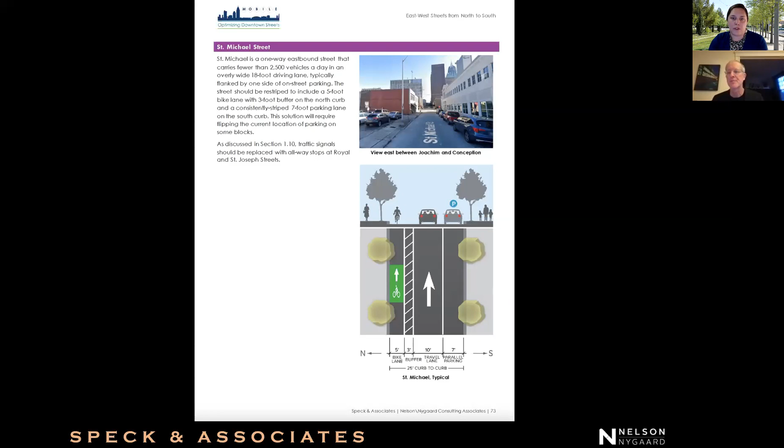So I'm going to pass it back to Jeff, who's going to explain all of this through the form of the presentation tonight. So thank you.

Thank you, Allison. And I also want to acknowledge tremendous participation and creative thinking from engineering staff, public works folks, others at the city, and of course the Bedsole Foundation that supported this study deserve our gratitude as well.

So I'm going to take you through what for Mobile are the 10 steps of walkability, or the 10 steps of making Mobile feel safer and actually be safer for pedestrians. But it all boils down essentially to driving speeds. It's a remarkable condition in cities that a car going 35 miles an hour is about 7 times as likely to kill you than a car going 25 miles an hour. And that difference between 25 and 35 miles an hour, which is the speed people are often driving in our city centers, is a super important difference.

The question is, what can we do to have drivers, while they're downtown, closer to the lower end of that scale? Elizabeth mentioned the data that had most recently come out, and it's disappointing to learn that among the most dangerous places to walk in the United States, Alabama as a state jumped up 2 places in the last 2 years, surpassing, I believe, Texas and maybe New Mexico, to become the second most dangerous state in the US.

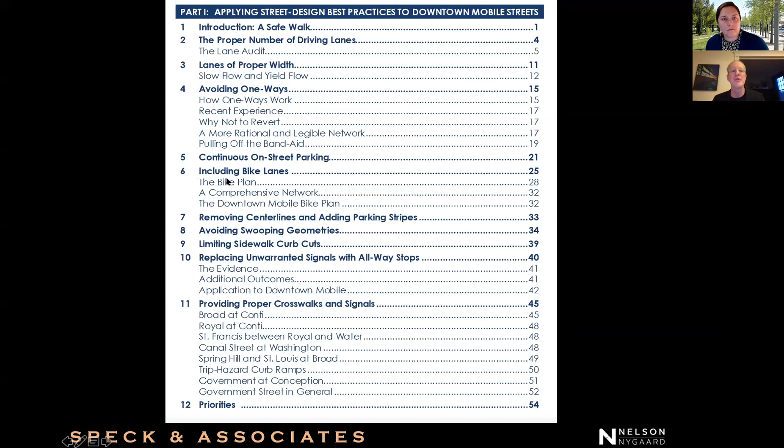There are, whenever I do this in a city, usually between 8 and a dozen things a city can change to make itself safer downtown. In this case, we have priorities and an introduction. Actually there are 10 items, 10 different things that can be improved in downtown.

And these are them. I'm not going to explain them now, I'm going to go through them one by one. But: no more driving lanes.

So these are the things you can do to make downtown more safe: having no more driving lanes than you need to handle traffic, having lanes of the right width, having few one-way streets, or at least fewer, having continuous on-street parking as much as you can, having a useful bike network as opposed to just a decorative or sporadic one, having fewer center lines in your street and more stripes that delineate the parking at the edge of the street, having fewer swooping geometries which encourage speeding, having fewer curb cuts across sidewalks where drivers cross sidewalks with their cars, replacing traffic signals with all-way stops wherever possible, and I'll explain why. And finally, the kind of obvious one, but one that still needs attention, is having proper crosswalks and, where appropriate, pedestrian crossing beacons.

So those are the 10 things, and the whole discussion today, except for the end where I'm going to talk about priorities, is taking you through these 10 steps and describing the changes that each step suggests. Now, Allison showed you how the plan was organized into 2 sections.

One is the 10 steps, and the other is the street by street analysis. I'm not going to take you through the street by street because that would be incredibly mind-numbingly painful and time consuming. However, what I've done is illustrate each of these 10 conditions to change by choosing a number of streets, in fact most of them, to which that pertains. So I'll show you that as we go. It's going to be a bit of a tour of downtown as we go.

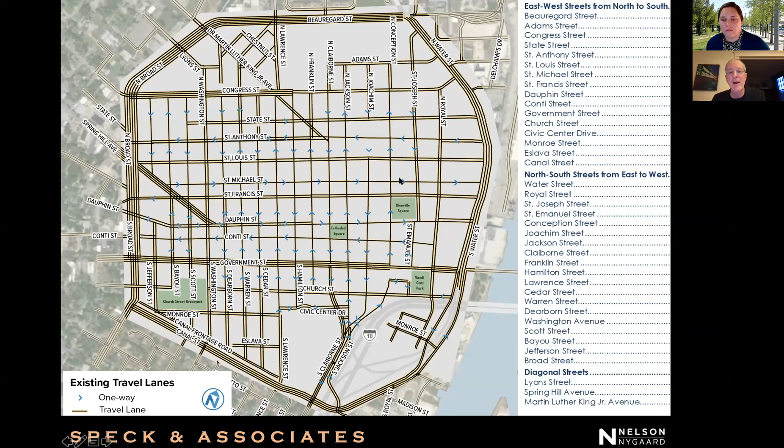You also have the diagonals of MLK and some other smaller streets like Chestnut, and then Spring Hill in this location. That's your map. So let's go one by one.

The first thing, and it's kind of obvious, is you don't want to have more lanes than you need. The more lanes a street has, the more it looks like a highway, the more it operates like a highway, the faster cars go, the further you have to cross.

This is Oklahoma City, where I worked on a team that rebuilt the whole downtown core, and we counted the number of trips. The key thing here is we call it a street audit or a lane audit. We count the number of lanes and we count the number of trips, and we compare the number of lanes to the number of trips.

We understand we need a certain leeway in there for growth and other things, but we look at the peak hour, the most congested hour. We know what a lane can handle. What we found in Oklahoma City, as we find in most cities, is that there are at least some streets—in places like Boston there's almost none—but in most cities there are some streets that have more lanes than they have traffic, and that means the opportunity to get rid of lanes.

So here in Oklahoma City, a typical street, we were able to turn it from this into this. And I always say this is the way to do it expensively. In Oklahoma City, they had a lot of money—they spent $200 million. I always tell cities, though, you can restripe a whole downtown for the price of rebuilding a few streets.

A more typical job, more analogous to what we propose for Mobile, is Cedar Rapids, where a typical street looked like this, and we did the car counts and were able to turn it into this. This is the day it opened, which is why there are cones and someone parking in the bike lane. But that's the sort of thing we've been doing now for 20, 25 years all around the US.

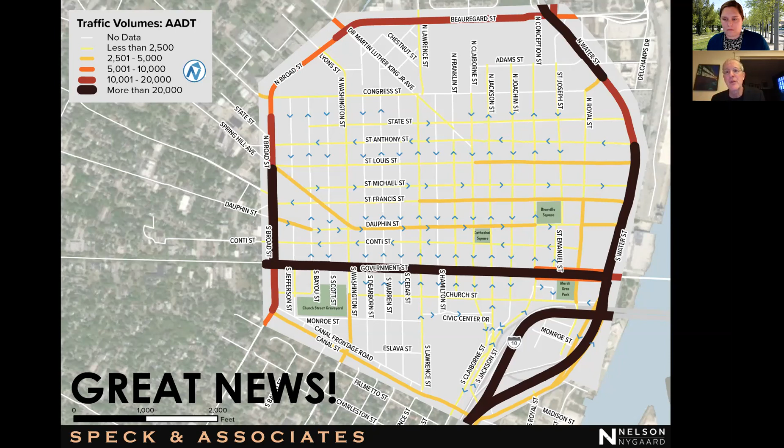Here we have a condition which is absolutely remarkable, which I haven't experienced since Cedar Rapids, where you have no problems in any of your streets. There's not a single one of these streets, aside from the highways and the perimeter, that can't be 2 lanes or less. So we have a condition we rarely face, where we can make the streets what they want to be without worrying about congestion. That's a great enabler for us.

To get into more detail, here's the map of demand again. This is what creates the number of lanes you need, and here's the number of lanes you have. If you compare them, the lanes flashing in red are actually extra lanes that can be put to better use.

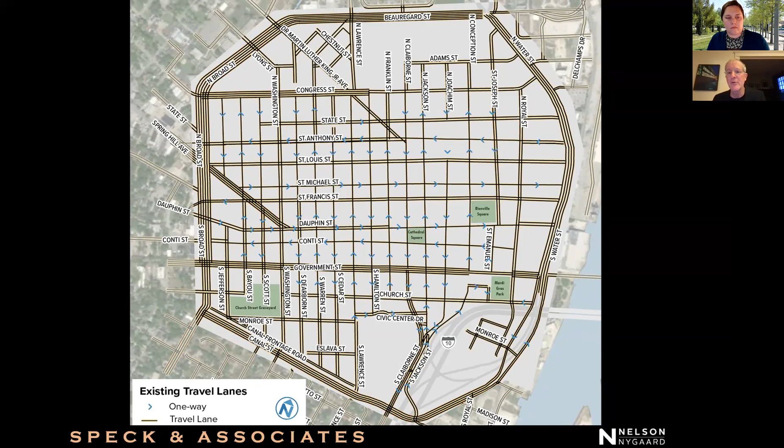What is that use? It could be parallel parking you don't have, bike lanes you don't have, or in certain cases narrowing the street, although that requires construction we don't typically recommend because of the cost.

Canal Street is one of many streets, and we can talk a lot about Canal, but it was created as a highway for traffic that never came. You've already restriped it to remove one of its lanes by turning it into a bike facility, so now Canal has about 2.5 times as many lanes as it needs, as opposed to 3 times as many. But you can see there's still excess capacity there.

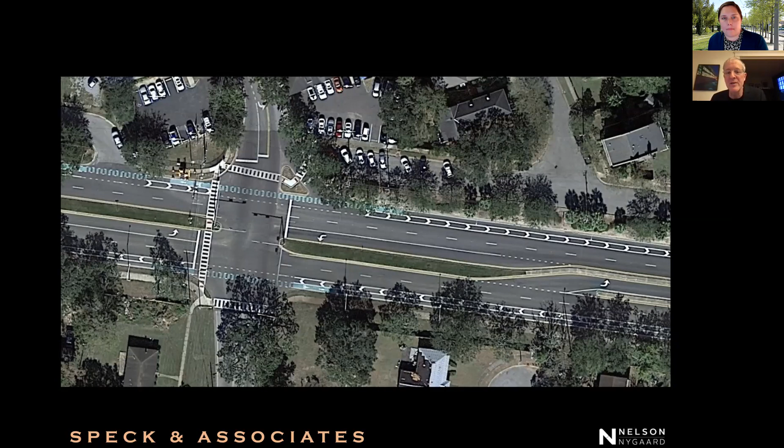The biggest challenge with Canal, unless you rebuild it, is that there's really nothing else you can put there because there isn't demand right now for much parking on it. So our short-term recommendation for Canal is to leave it the way it is, albeit better protect the cycling, because we don't have a better use for all that asphalt.

Congress Street, coming in from the west with 4 lanes, only needs to be 2. Spring Hill, coming in from the northwest with 4 lanes, only needs to be 2. MLK has between 2 and 4 lanes, depending on whether this illegal parking is made legal along the curb, but 3 to 4 lanes only needs to be 2.

Washington Street, as it approaches Canal in the southern part, has an extra turn lane it doesn't need. Royal Street has center turn lanes it doesn't need, which make it impossible to park on this curb, something businesses there would very much like. Claiborne, heading south of Government, has a lane more than it needs, etc.

These feeder roads along the highway that connect Water Street to Canal Street, and could actually be an important part of a circular bike network, have twice the lanes they need. And Dauphin, west of Claiborne, where it's 2 lanes eastbound most of the time, has a lane more than it needs to carry traffic.

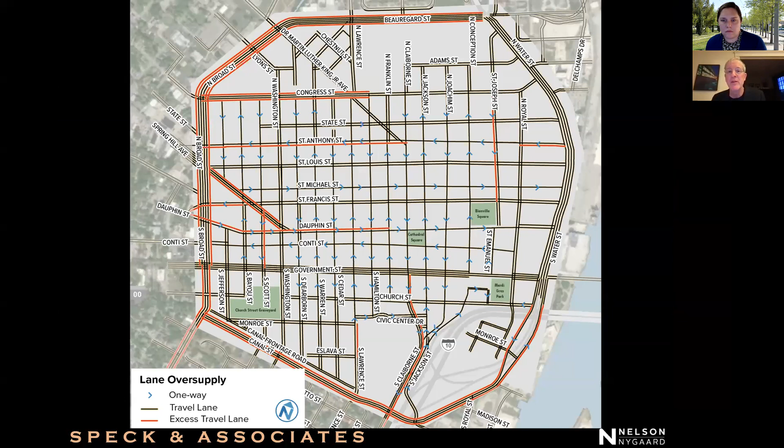So you see all those lanes I mentioned in red - I may not have mentioned them all, but that's all money in the bank. There are really a couple things that are money in the bank when you're doing these plans in terms of opportunity for making downtown better.

The other one is the width of the lanes - that's the second item: lanes at the proper width. We've known for some time that the wider lanes are, the faster people drive. Generally speaking, a 10-foot lane is the proper width for a high volume downtown lane. NACTO, the National Association of City Transportation Officials, has made this very clear.

The reason they've had to make this clear is that over the last few decades, starting in the 80s, there was mission creep of wider lanes taken from highway design—used because people are speeding—into downtown design. Downtown lanes in many municipalities became 11 or 12 feet wide. In places I work, like Albuquerque, that's still the rule. A 12-foot lane is a 70-mile-an-hour lane. There's no reason to have a 12-foot lane that induces speeding when you could have a 10-foot lane instead. That's an important model to understand.

On the slower, more residential streets in downtown Mobile, a full 10-foot wide travel lane doesn't make sense when volume is quite low. In fact, the most valuable streets in every community—the kind of street I was fortunate to grow up on—have two-way travel in an area typically 12 to 13 feet wide. Because there's not much traffic, it functions well as what's called a shared street, yield street, or queuing street. That model's available to us as well.

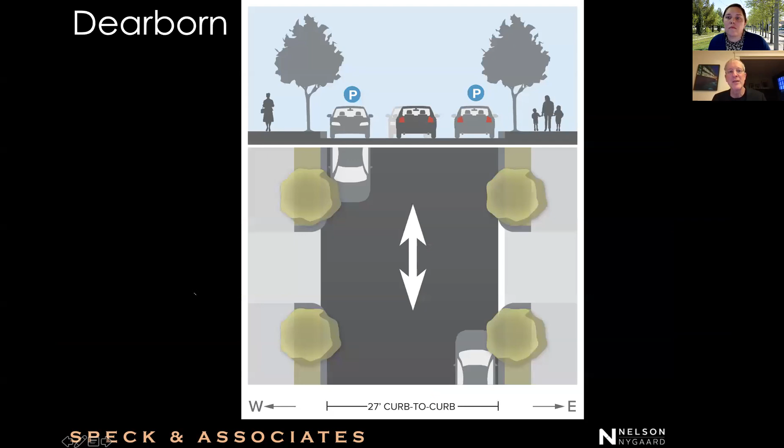But what happens is that the parking isn't that thick, and you're able to duck and weave between parked cars. It's precisely this sense of friction that makes the street a safe street. That's a model we need to use. Dearborn enjoys it; Monroe Street, in the same neighborhood against Canal, enjoys it too.

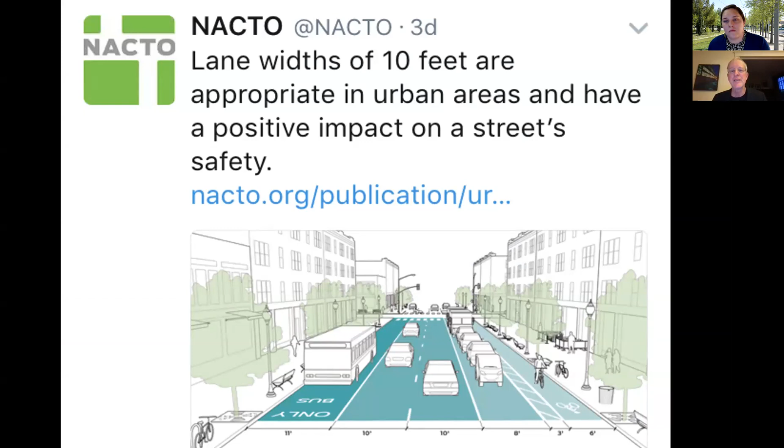But let's look at some examples of where we're violating these rules. In terms of the 10-foot lane, Congress Street—here's a section that's 3 lanes wide, so it should be 30 feet wide, but it's got an extra 15 feet in it. Here's St. Joseph, which has parking on both sides and should be about 36 feet wide; it's about 45 feet wide. Here's St. Anthony, which has an extra 5 or 8 feet in it.

Washington—this is 2 lanes, no parking, should be 20 feet. It's 30 feet. This is money in the bank, things we can use for other purposes. Claiborne—these lanes are about 15 feet wide, south of Government Street.

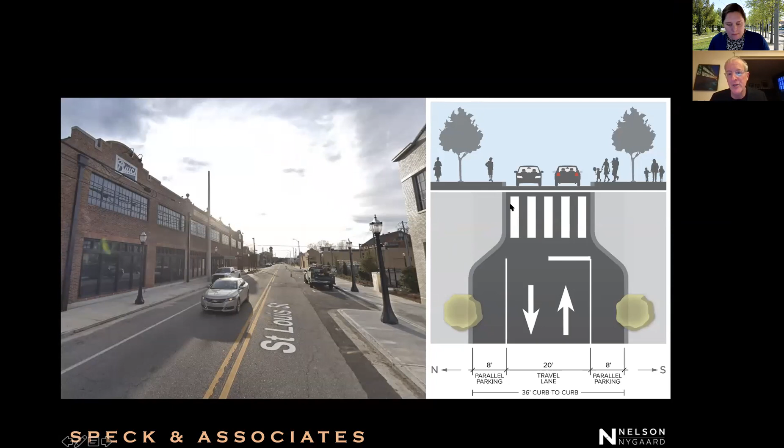St. Louis Street, interestingly—and we believe we've influenced this—is currently being rebuilt quite nicely, but with a 12-foot standard. So this street that should be 8, 10, 10, 8 is instead 8, 12, 12, 8. We're recommending it continue to be built in the same fashion, but with a proper 20-foot zone between the curb bulbs, not a 24-foot zone between the curb bulbs at the crossings.

Then you've got two different types of one-ways that have a little extra space in them. You have one-ways with significant traffic—your east-west one-ways—and the ones on the eastern half of your downtown that are more in the heart of the city and don't have the light traffic that would make them a proper residential yield-flow queuing street like you'd find on Dearborn.

On a street like this, you've got about 16 or 17 feet where you only really need about 12, since it's only one lane—10 feet is a little narrow for a single lane. So you need at least 10 or 12 feet clear here, but you don't need 16 or 17 feet. Conti is the same circumstance—you can see some parking here that no one's using, but it's got that extra width.

Conception, same thing, just a little bit extra width. Claiborne as well, and also Franklin when it's in the more...

Now we're changing to a different type, the Dearborn type of street. So there's a bunch of streets now, unlike this one in the heart of downtown, that are further west or further north.

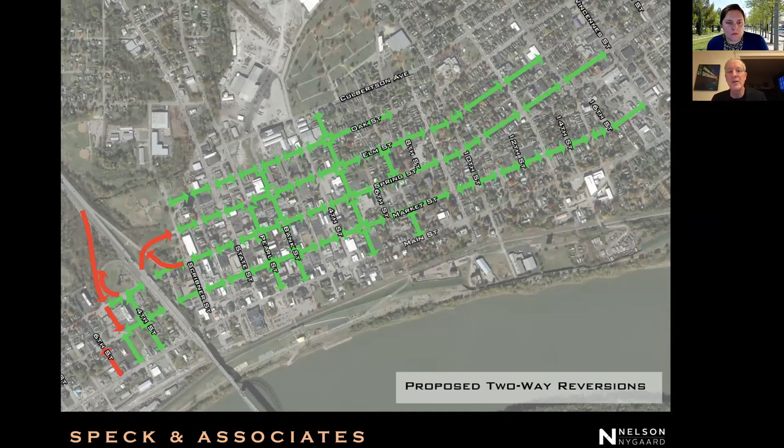And the folks who were worried about it, like the police chief, are actually the biggest boosters for this plan. The police chief says he's never seen a better scenario for public safety. Speeds have been reduced, crashes are down, and response time to calls for service is far better than it's ever been. I have separate testimonials that are in the plan that discuss how it's really helped business as well.

Now, we don't recommend it for every street in every city, but the fears that people have never seem to materialize about what's going to happen when you, and we say revert, not convert, because when you revert these streets back to the two-way traffic that they once enjoyed, you're really just returning them to their original state.

The condition then in downtown is that you have a couple larger streets, St. Joseph, which is already headed towards two-way travel, and St. Anthony, which is the other major street that we're recommending for two-way travel. The remainder of these streets are these delicate little neighborhood streets that we already described as having a little extra room in them and being similar, for example, to Monroe or to this piece of Dearborn that are already two-way, but simply maintain their one-way travel.

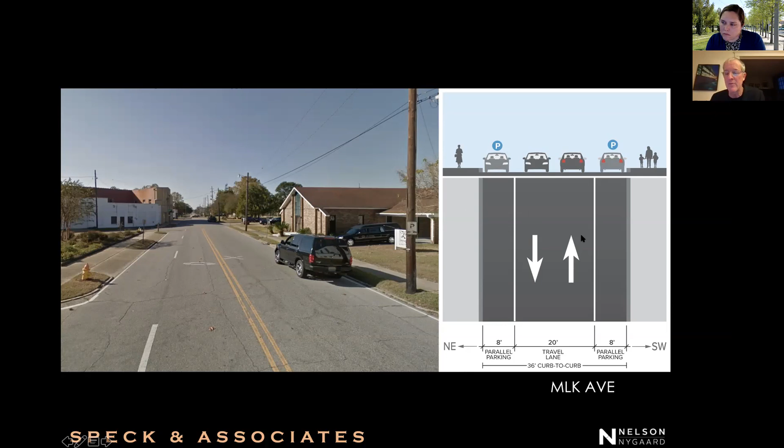One of those is MLK, which people park illegally along, but there's no reason these extra driving lanes couldn't be permanent parking lanes. So that's what we're recommending. Then there's the main stretch of Washington, north of Spring Hill, which is this 30-foot street that could be a 20-foot street. We're making the parking as wide as we can, 9 feet, giving you an extra foot still, but much safer and more normal width for your driving lanes.

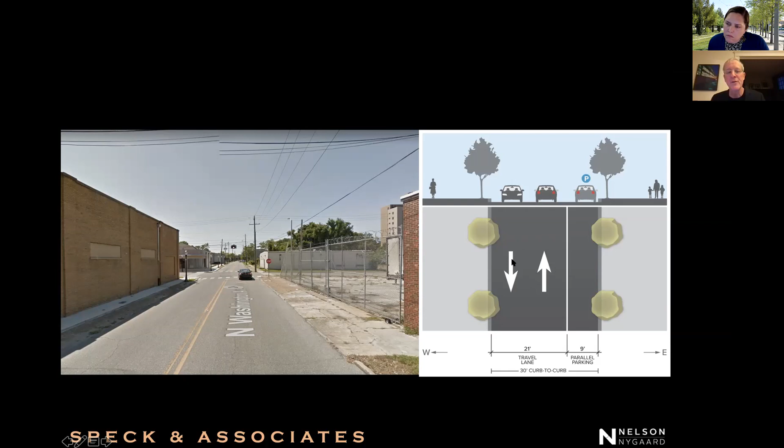So that's our recommendation for Washington.

St. Joseph is being converted to two-way travel from one-way, but it also has an extra 10 feet in it. When you have an extra 10 feet in a street, you can tremendously increase your supply of parking downtown by making one side of that street angle parking. We worked on a street in Tulsa with the exact same dimension, a newly built street that functioned perfectly well with angle parking on one side and parallel parking on the other. So that's what we're proposing for this stretch of St. Joseph, which will significantly increase the amount of parking right near the heart of downtown.

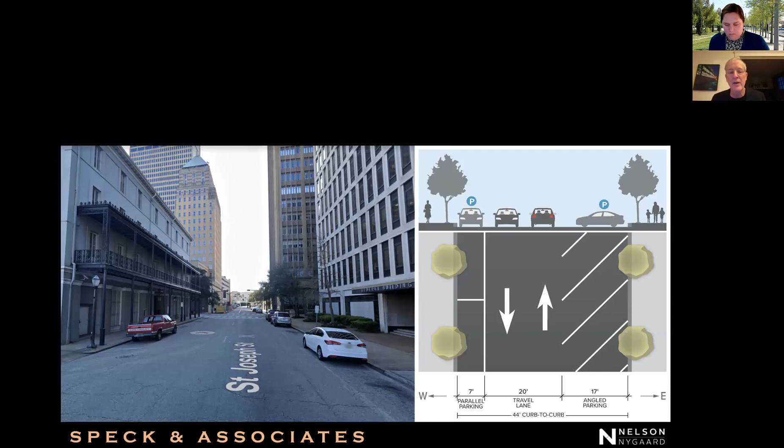And then there's Dauphin. Dauphin has this condition, many of you are probably aware of it, where west of Claiborne it's 2 lanes, east of Claiborne it's 1 lane. That's because it narrows at Claiborne.

In this western area, you are allowed to park overnight, but you are not allowed to park during the day. And you're allowed to park on this flank, the southern flank, but you're not allowed to park on the northern flank.

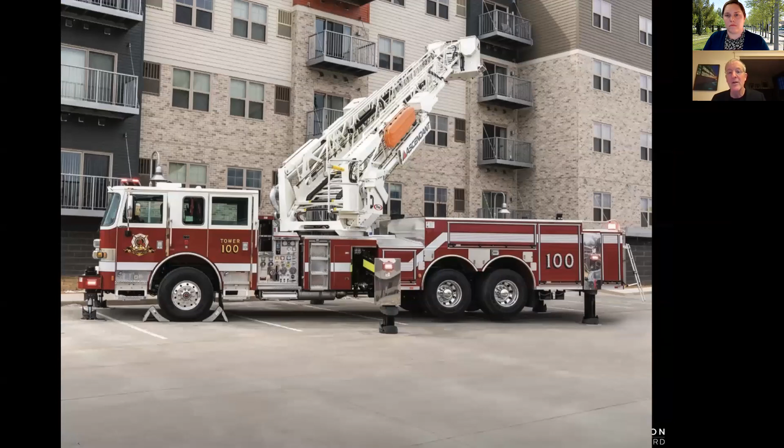So the concern there, and it's a legitimate concern, it's a life safety concern, is that fire trucks need to fit. When the fire truck sets up and puts out its stabilizer, and by the way there's only 1 stabilizer on your fire trucks, which is an improvement over many cities, 14-inch wide stabilizer, when it puts down its stabilizer the truck is actually, at that location, 18 feet wide. And what you have here, if you park on both sides, is only about 14 feet.

So this has been the impediment to having permanent around-the-clock parking on both sides of Dauphin Street. We really feel that the lack of parking on both sides of Dauphin, both in terms of safety but more so in terms of just vitality, is the principal thing, if I had to pick one, holding you back from your downtown reaching the next level, going from being a somewhat regional tourist destination to more of a national tourist destination. It's having the kind of quality of life, protected sidewalks, and activity that would come from parking both sides of this street.

So we're very concerned about life safety issues, and we have a compromise proposal that we think should be considered. Honestly, if you look at the data, I feel the best solution is just continuous parking. But there's another solution in which the parking spaces could be located - this is flipped, so you need to do a mirror image of this to match the drawing. You already have a continuous parking lane on the southern edge, and that's what's shown here.

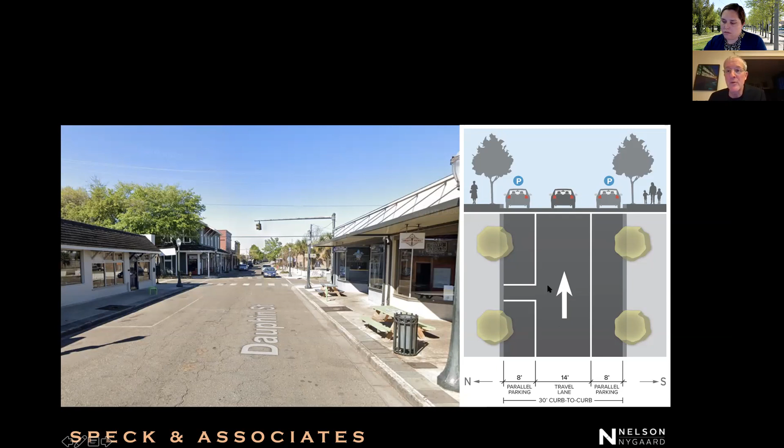On the northern edge, we recommend a solution that periodically, maybe not between every space, but it would be fine if it was between every space, you have a 3-foot zone, wider than the 14-inch stabilizer, so that if you needed to park the fire truck, that's a location where every 20 or 40 feet or so you could insert the stabilizer. Obviously, I don't want to be naive about it - that requires a little more care in parking the truck, and we don't mess with life safety.

So life safety is important, but life safety really has to do with the risk of injury from fire and the risk of injury from car crashes. We know what the car crash injuries are on this street. I do not have any information about fire injuries on this street. I do not believe, and I don't want to make light of fire - I take fire very seriously, I don't want to make light of that risk. However, I do want to tell you this.

Nationally, car crash injuries outrank building fire injuries by a ratio of 180 to 1. In our conversations with the city, I've been forthright about saying we need to think not about fire safety as a silo, but about life safety. How many people are living, dying, being injured or not in your downtown? I feel confident saying that the risk caused by a slightly slower fire response is statistically insignificant compared to the people getting injured every year on this street from cars driving too quickly. So as someone who has no dog in this fight, who just wants the safest downtown possible, but understands that fire is one of many risks, I'm advocating for a solution that puts parking back on the other side of Dauphin. I think we've waited far too long for it, and it's really held your downtown back. So I'm recommending this solution.

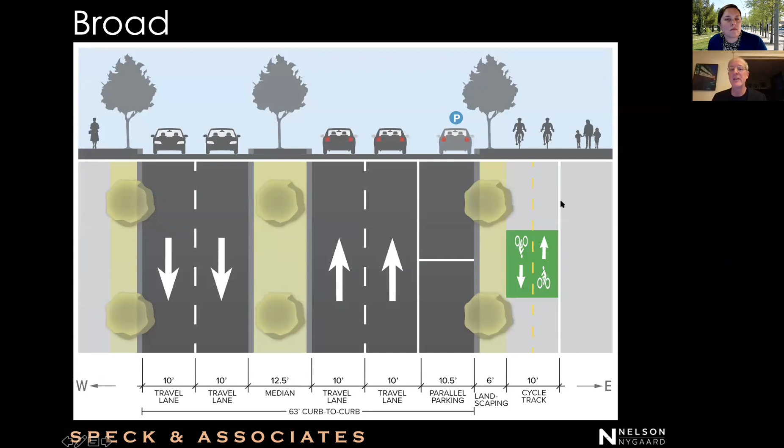Water Street - the original plan for Water had vertical separation in the buffer zone. As this sits now, it's basically a bike lane and a highway. I'm a very comfortable cyclist - I would not cycle here. I know you have cyclists who do, bless them, but this is not a bike lane that's going to attract folks until it has vertical protection in it that makes it truly feel safe as well as to be safe.

I understand there's been various legal conversations about perceived impediments to this. All I can say is it's not a state road, it's a downtown city road, and those legal impediments have certainly been overcome in most other cities. So I believe there might be an interpretation happening that is overly strict as to what's possible.

Putting individual planters in the street, in the buffer zone, with some space in between them, is the clear and easy, inexpensive solution. However, this may require an additional investment. It was brought to our attention that keeping these lanes clean, particularly in Mobile, is really a challenge, so you may need to acquire a skinny street sweeper to specifically sweep your bike lanes. It's certainly worth the investment to have a cycling population.

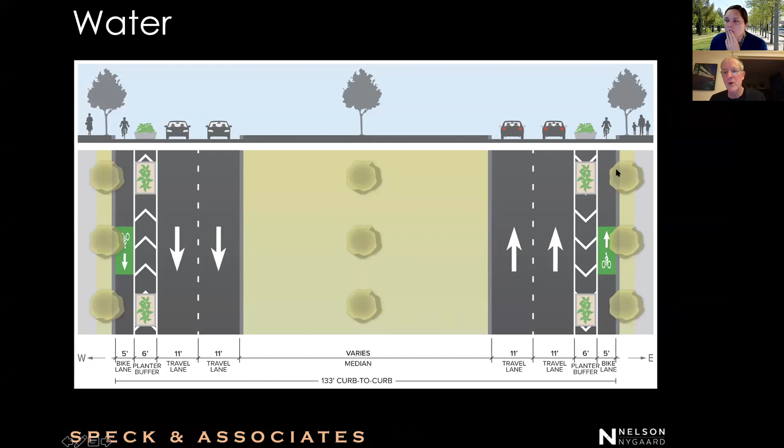So the plans for Water and for Canal are the existing plans, but with these little logos suggesting the presence of planters being dropped into those buffer zones, which will also cause drivers to go a bit slower. Canal Street, same thing, existing plan. We don't feel there's a demand for parking here, so we didn't add parking, but we did suggest planters going in the bike lanes and bike buffers, as you see there.

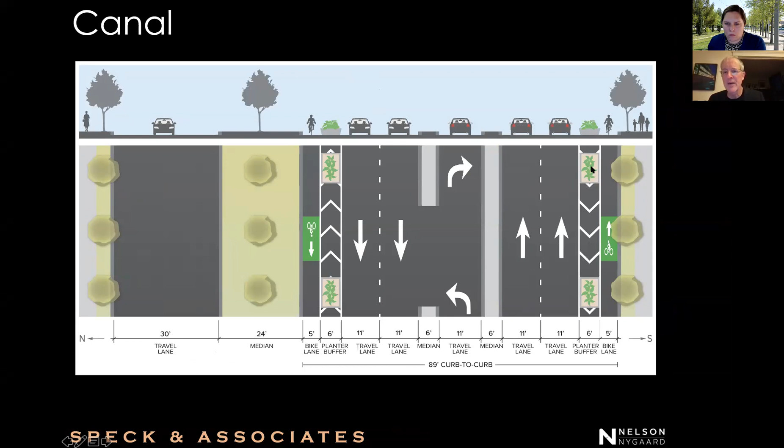But what's missing is this connector between essentially Government and Claiborne. What you have there are these multi-lane one-ways designed like highways because they're along the highway, but actually they're not highways, and they're not carrying much traffic at all. So in these, you have the opportunity, extra space to use up, to have a bike lane.

This varies through the section, and this section gets wider and narrower through different parts of it. This drawing may not apply to this exact location, but based on the width of the street, you either have a buffered bike lane, a bike lane with no buffer but up against moving traffic, and parking, or all three of those things. People do park, as you can see, under the overpass and elsewhere along here in order to access the cruise terminal.

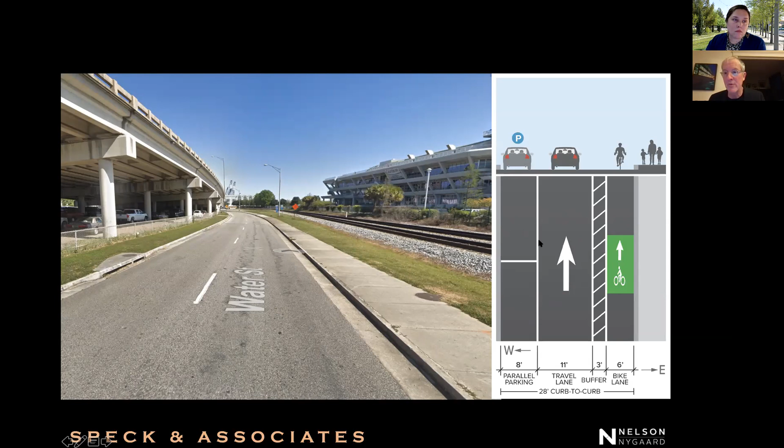It isn't parked in all the time. I don't mind if you stripe it and no one uses it, but the point is to create a single driving lane and encourage slower speeds, and also to welcome bikes. Bikes against one lane will feel much safer than against two lanes in this location. So that's the general solution for both north and south stretches through this area that gets you the full circle.

Then we have Washington Street. If you look from the north and south, a lot of people come to downtown, some on bikes, from the south. Not so many from the north, because if you look at the population distribution, it's mostly west and south. The western area will be handled by Broad Street, where people can go north and south and transfer to east-west trajectories. From the south, almost all of them are coming in on Washington, particularly because all these other streets have been stubbed out up against Canal.

So Washington is the most important north-south corridor, and it connects to Spring Hill, which we've already described as having extra space in it. This segment of Washington, where you have 3 lanes, only needs 2, so it can fit bike lanes and driving lanes, and there's perfect room for them next to each other.

Additionally, it gets narrower in some places, and in those narrower places, it's important to understand that this was a struggle. I did the multimodal plan for University of Alabama, and it took them a while to learn that a piece of paint is not a wall. But in terms of the width of your lanes and the ability to fit cars, buses, and other vehicles on your streets...

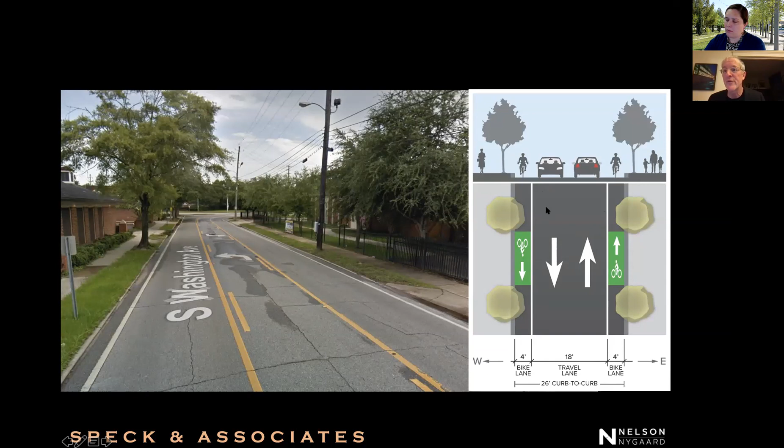The paint along the bike lane is there to encourage folks to stay in the middle, drive a little more slowly, and stay away from the cyclists when they're in the lane. But when there's no cyclist there, there's plenty of elbow room for passing another vehicle, so you don't have to worry about it being too tight. Some of these streets become narrower, 18 feet or less, understanding there's extra give in the bike lane. Spring Hill, we mentioned, has a ton of room in it, as well as parallel parking.

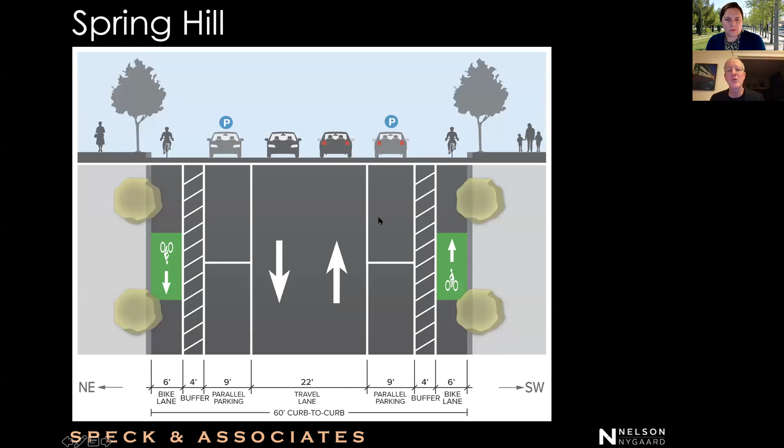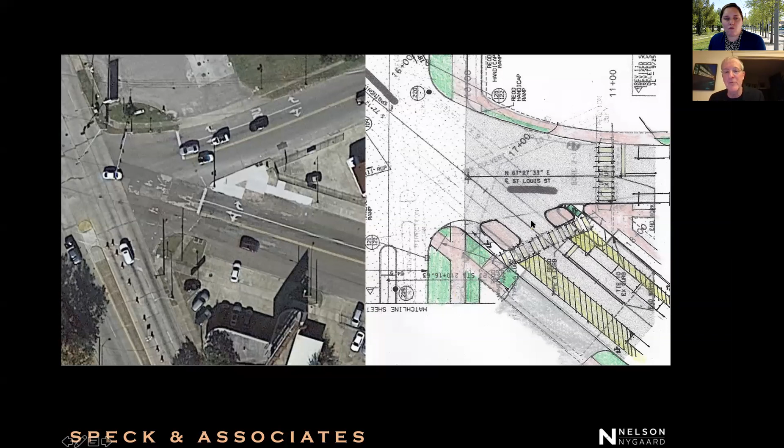Here's where we're suggesting the same example I showed you in Cedar Rapids, where the bike lanes pull off the curb and we create what's called a cycle track, protected bike lanes along the curb on both edges, because there's room for it. We've already been working with your engineering department to make sure this intersection where it meets St. Louis and Broad, which has bulb outs that currently get in the way, is being reconstructed to allow for through bike motion on the corners so this solution works there. That was kind of an on-the-fly thing we did during the workshop.

So that's this north-south corridor, which handles the west part of downtown. What about the east part? Well, there's Claiborne, which has extra room, and Lawrence, where residents, to fight speeding on their street, didn't want a two-way street, they wanted a bike lane. So we thought, perfect, because there's a pair: Claiborne is a southbound street, and Lawrence provides the northbound pair. Now you have a south and north pair in that location.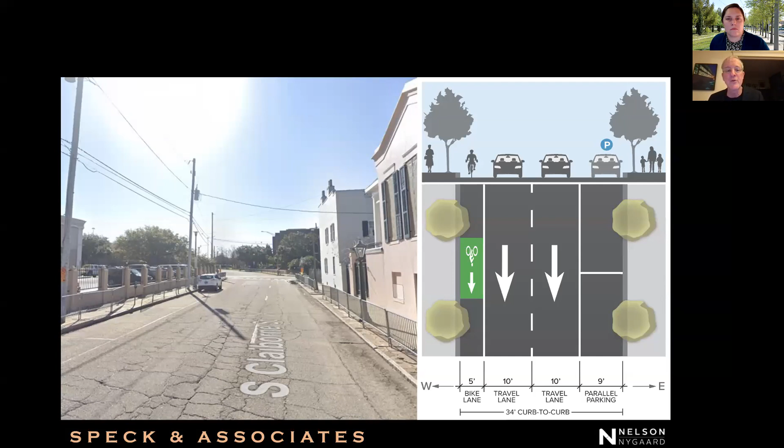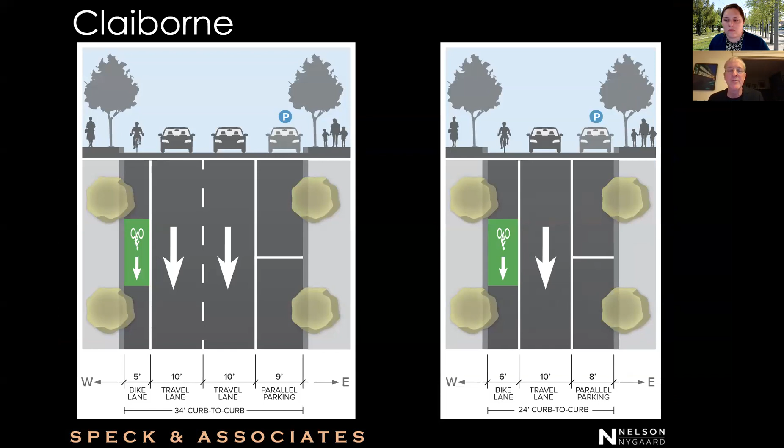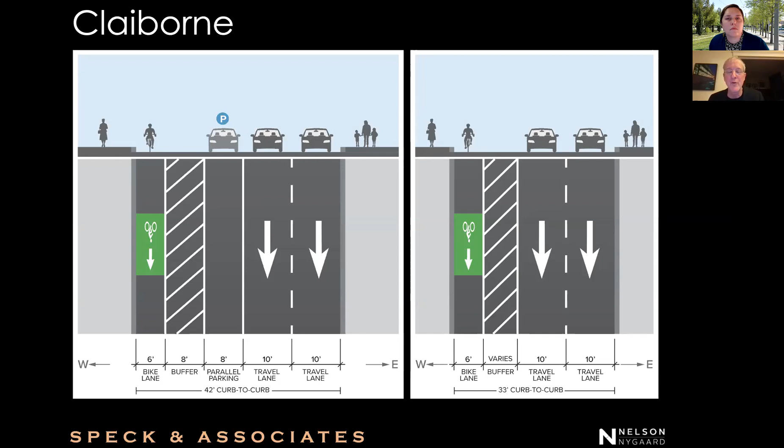On Claiborne, the lanes are so wide that you can put in a bike lane and expand the parking lane and still have 10-foot driving lanes south of Government. Depending on the width of the street in different locations, it will keep a bike lane and sometimes have 2 lanes, sometimes 1. It changes, it's quite a long street with many different dimensions. Many of our street sections in the second part of the plan are 3, 4, 5 pages long to handle all the different conditions along your different streets.

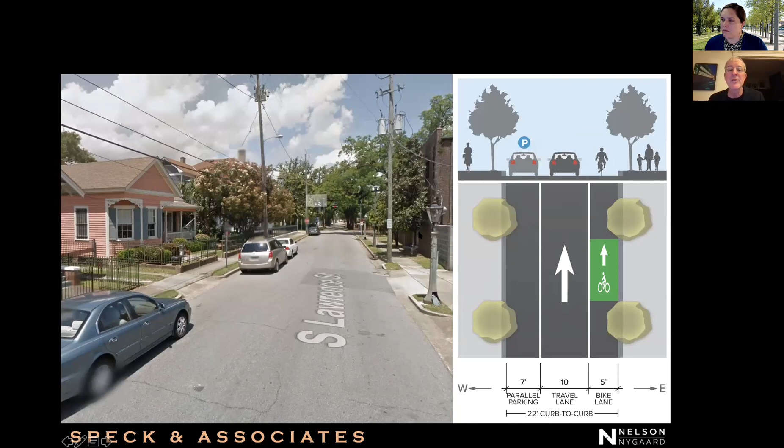Then you have Lawrence again with an extra lot of feet in the street that allows the parking to remain, and against the wall here you can insert a bike lane as well. So that's that pair. And then you have all of these downtown north-south streets, actually some are east-west, we'll talk about them, but these one-way streets that should not be two-way because they have too much travel, but they've still got an extra 5 feet or 4 feet or something that makes them too wide.

So here, on Conception, without changing anything, you just stick a bike lane in the road next to the cars. Notice this would be a mirror image to match this picture. Notice it's not in the door zone, it's almost always on the other side of the street. And notice it's just paint, not a wall, so the experience driving is no more constricted except visually. That visual constriction will cause safer driving.

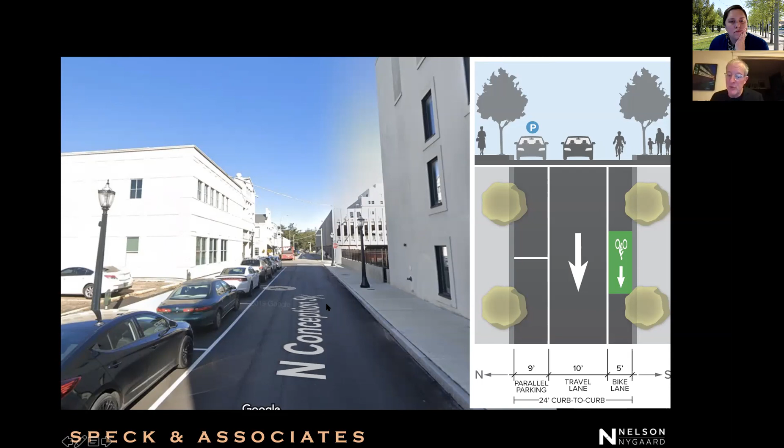Similarly on Joachim, similarly on Claiborne, similarly on Franklin. Then other north-south streets, you have Lawrence, which comes in super wide as a 6-laner from the north, another highway condition that never occurred. There we have room to add parking protected bike lanes like we suggested for Spring Hill, that's up in here. And then Congress, we're doing north-south streets.

So then you have St. Michael. And St. Michael, now we're switching to east-west. That was the end of the north-south. Now we're switching east-west. You have this condition in St. Michael, St. Francis, and Conti, which is similar to what we saw in Conception, Joachim, Claiborne, and Franklin. And by the way, why not every street? Well, not every street needs a bike lane, but also it so happens Jackson has parking on both sides, so we would have to eliminate parking to put a bike lane in there. No reason to do that, right? So now heading to the east-west streets.

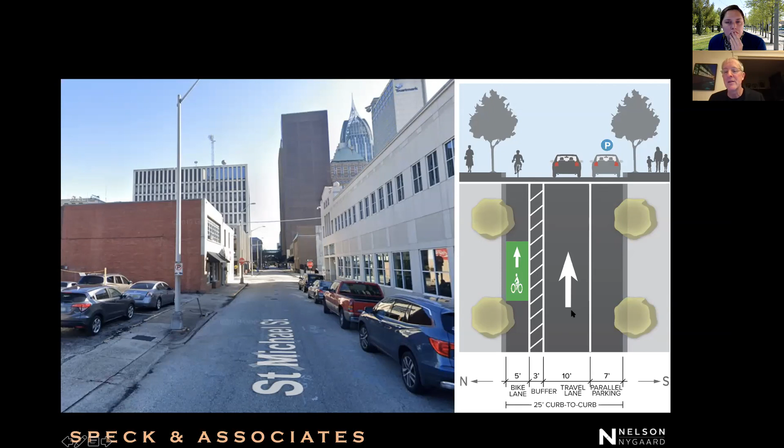St. Michael is another of these streets that has so much extra room in it, we can actually put a buffer up against the bike lane and keep the parking. Conti, add a bike lane. So that's this pair, St. Michael and Conti.

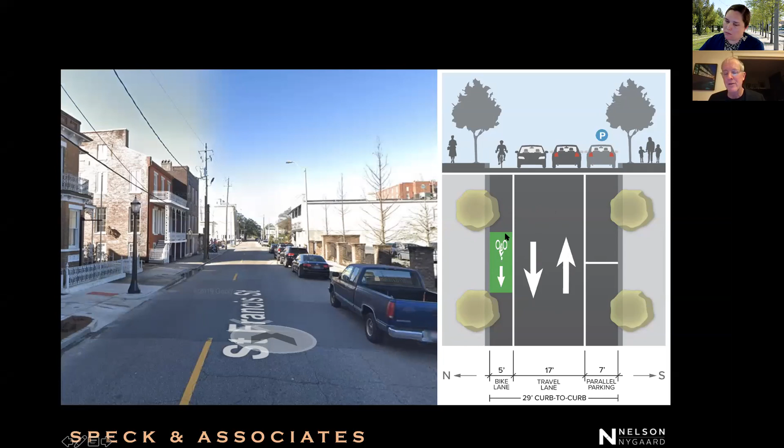And then St. Francis is a little bit different because it's two-way and it's a little bit narrower. You'll notice this is less than 20 feet, it's only 17 feet. This is what we call a slow street, not as narrow as a yield street. Two cars can pass, but a car and a bus, not so easily, if it wasn't for the elbow room provided by the bike lane. Cars are 6 feet wide, buses are 8.5 feet wide. When they pass each other, I wouldn't do this in 17 feet if the bike lane weren't there. Clearly, if there's a bike in the picture, people will exercise more caution, but this is a street that could take a bike lane just to make it a narrower driving area and to allow an additional street that is the opposite direction of St. Michael

So if you take St. Michael east, yes, you can go all the way down to Conti to go west, but you could also go west on St. Francis. So that's that.

But the eastbound bike lane would take Congress Street and then use the Claiborne pair, right, to the Claiborne-Franklin pair, to transition on Claiborne over to State Street.

We had meetings with every neighborhood, and the folks in this neighborhood were very forthright in saying cars are driving too fast on Congress Street and too fast on State Street. We said, well, then we should introduce these slow flow geometrics, the 17-foot shared lane, but we can give you parking or we can give you bike lanes. Now, parking would be a little tight, because then you'd have really no give - you'd have 16 feet constricted by car doors on both sides. That seemed a little tight, but the residents said very clearly, we don't need more parking. We'd like the bike lanes.

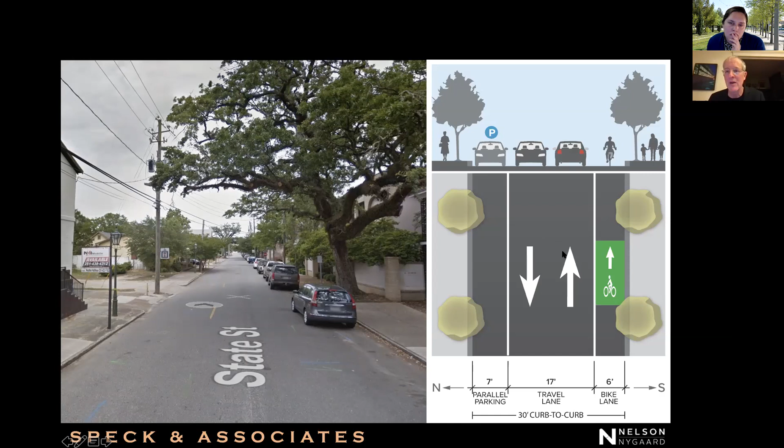So the bike lane that comes in on both sides of Congress splits at Claiborne and Franklin, as you see here, and then half of it goes into State Street and half of it remains in Congress Street. In both cases, you have a slow flow but ample 2-way travel zone, and a bike lane without any physical protection, so that if a car and a bus or 2 trucks happen to be passing each other, there's just as much elbow room in the street as before - but the street currently lacks the visual constraint that would cause people to go more slowly.

So that's that part. Now, I do want to bring this up. A lot of people talk about cycling as this elitist activity. I think if you look around Mobile at who's cycling, but certainly if you look around the country at who ends up cycling when you provide ample bike facilities, it's the furthest thing from an elite investment you could make. Fully 39% of the people who commute on bicycles in the US come from the poorest 25% of the population. So this is something you can do to help with equity and to make Mobile a city that works for everyone.

I apologize, the bike part is always the longest part and always the most complicated part. The remaining parts are all shorter and simpler.

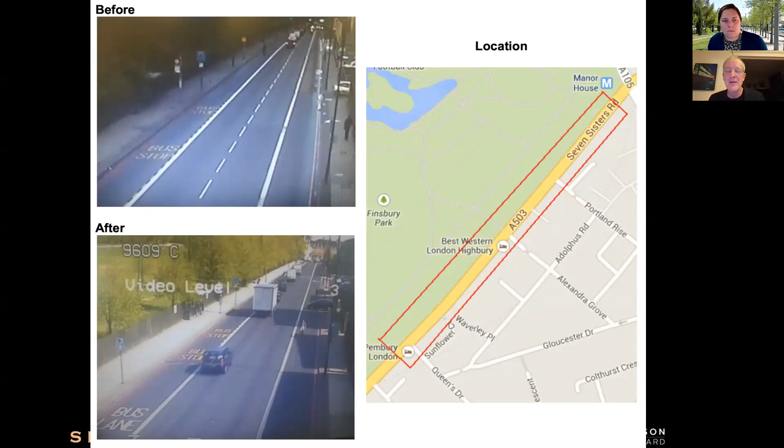Interesting thing about center lines - we only discovered this a few years ago. A study was done in London. We welcome more studies, and certainly people's experience in our communities has supported this anecdotally. When you remove the center line from a street, on average, people's speeds drop 7 miles an hour. Why? Well, it's a little confusing, but in fact the center line is something that makes you know that no one's going to hit you. So without the center line, drivers are more cautious. Our standard, unless we're making high speed, super high volume streets, is to remove center lines from your streets.

So I showed you Congress before and after. I showed you a whole bunch of streets you might have noticed in this talk that have no center line in them. There's a reason for that, and we think these streets will be safer without center lines. Additionally, you'll notice the parking isn't striped here, which is okay if there are people parking. But if there's nobody parking, then actually having the stripe in the street communicates that visual constraint in a way that slows drivers down. So striping the parking lanes instead of the center line is something that slows traffic.

I wanted to add one more thing, which is you all are concerned, folks at the city are concerned, and we are concerned that when you convert a street from one-way travel to two-way travel, that people shouldn't be confused about that fact. And having no center line can be confusing. So we do recommend that for your one-ways that are converted to two-way, like St. Joseph and St. Anthony, that for 25 or 50 feet from the intersection, you stripe the center line, but then you stop it - so the middle of the block has no center line in it.

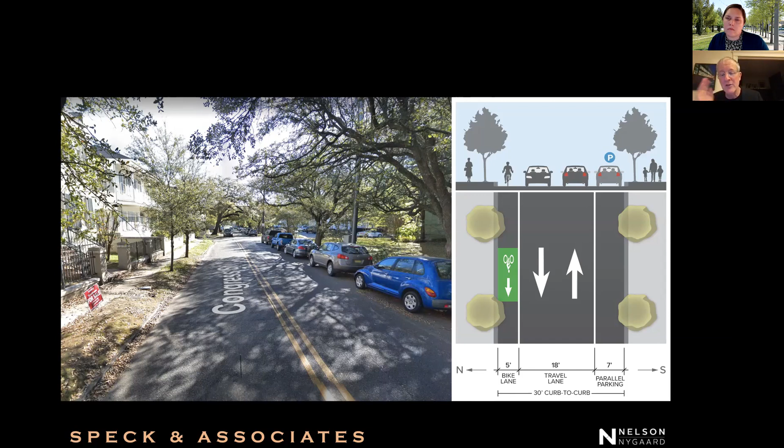Swooping geometries. People understand the vocabulary of the spaces that they're in. If a place is designed for automobiles, they feel it and they speed up.

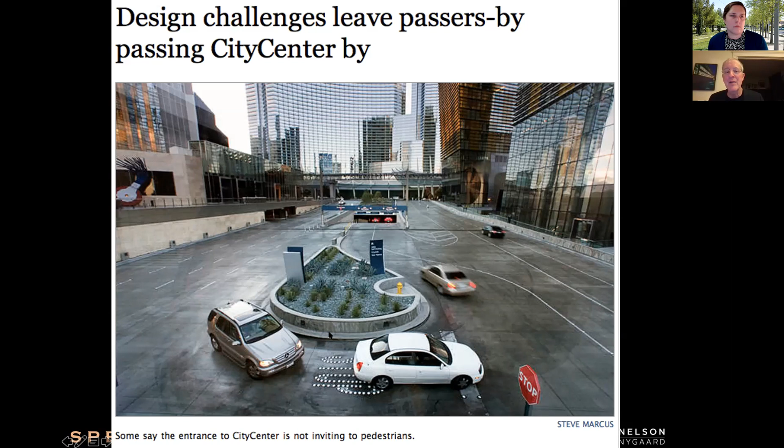This is the famously unsuccessful, or somewhat successful, addition to the Strip in Las Vegas, and the Truth in Journalism article says the entrance to City Center is not inviting to pedestrians, because when you have all of these kind of aerodynamic, slip-form geometric shapes, they communicate the vocabulary of the automobile and not of the pedestrian. More importantly, they actually encourage and enable speeding.

Here in Mobile, you have a few slip lanes where pedestrians are going with frequency. The most important one is probably where Dauphin terminates on Water Street.

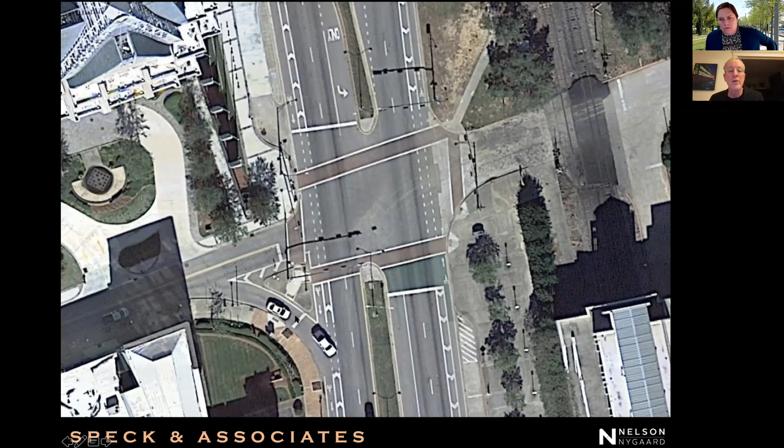It's important to know that sometimes these are introduced so that trucks can turn the corner. In this case, when you have a wide receiving street, this one is 35 feet across, trucks can easily turn into the far lane and then curve back into the other lane if they want. So this slip lane serves absolutely no purpose except to encourage drivers to speed around the corner, not obey the signal, and endanger pedestrians crossing in this location. We recommend that slip lane be closed immediately.

There's another slip lane at St. Louis—wait, let me make sure. Sorry, no, this is Dauphin again, the same location I showed you before. I wanted to keep this picture in the show to point out that it used to be worse: not that long ago, there weren't even crossings in this location. So progress is always being made, and I don't want to ignore that.

Then you have the worst intersection, not statistically, but perceptually, in all of downtown: where Beauregard meets Water, meets the interstate. This segment of the street and points west is being rebuilt as part of the Broad Street reconstruction. Until it's rebuilt, it has the same problem of an unprotected bike lane against a highway, but vertical protection or an out-of-street bike lane will solve that. Nothing will really solve the problem of this intersection, though, with these slip lanes in it.

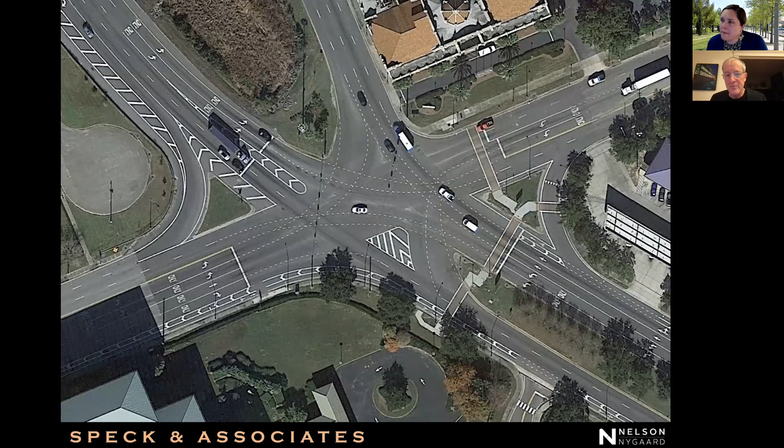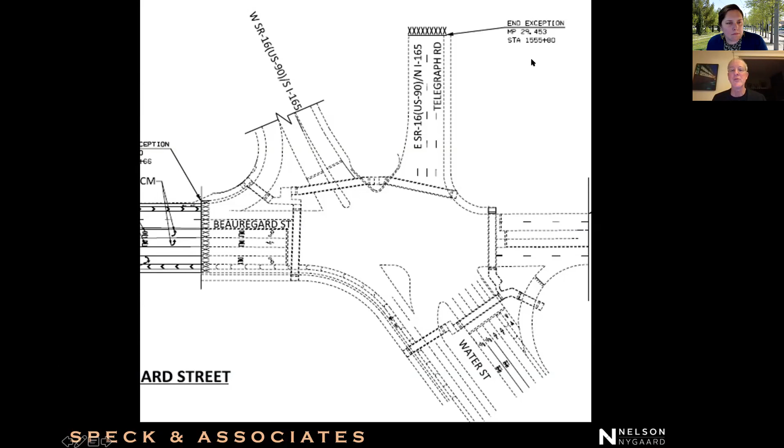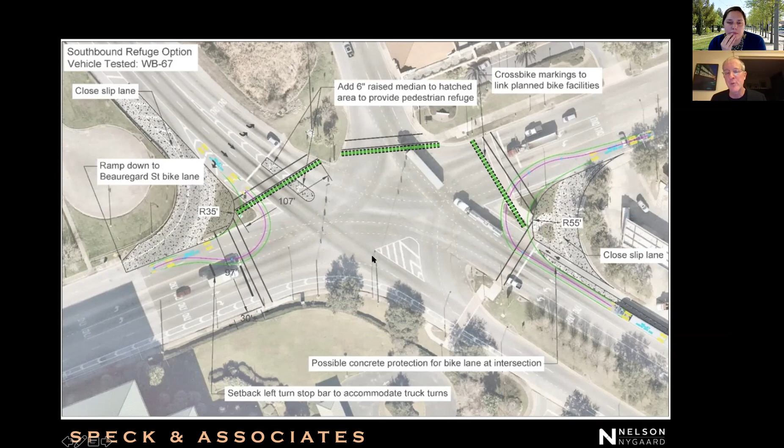We worked with engineers, and there's an opportunity: it's currently under consideration for restriping, moving forward with a plan that maintains the slip lanes and swoopy intersections. So the engineers at Nelson Nygaard worked on it. We came up with an alternate plan, submitted to the city, making sure truck turning motions work at this corner and that corner. We removed the slip lanes, shortened the crossing distances, and introduced bicycle crossings—since this is a bicycle-friendly street when it's done, with Beauregard having bike lanes on either side. This proposal has been submitted to the city some time ago.

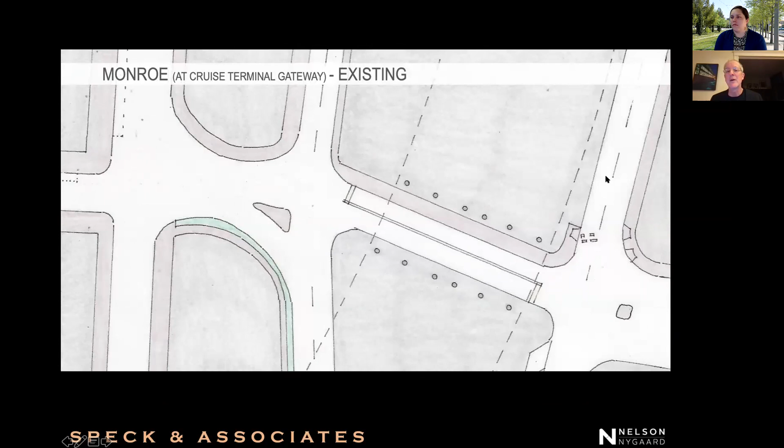So we took it upon ourselves to redesign this whole segment, and you see a whole bunch of changes here. The first thing you see is parking on Royal Street being introduced to both sides, or one side as appropriate. You see bike lanes and parking being introduced to these very wide two-lane streets on either side of the highway. You see the street underneath the highway being given 10-foot lanes, so parking now fits, and the center line being removed away from the intersection.

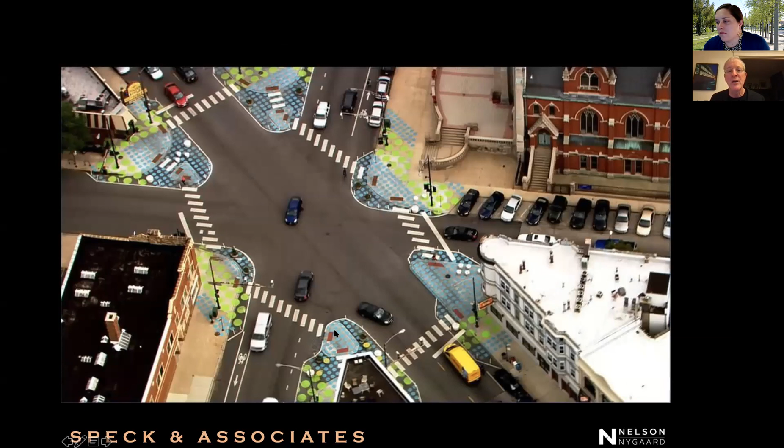And you see the slip lane and extra swoopy curves being repainted—there's a certain kind of epoxy gravel surface you can use to extend curbs. We've added parking, we've removed the slip lane, and this is a similar temporary project, from Chicago. You can see how with paint and surface decals and other things, you can, in an inexpensive way, without changing any of the drainage, create a more urban condition.

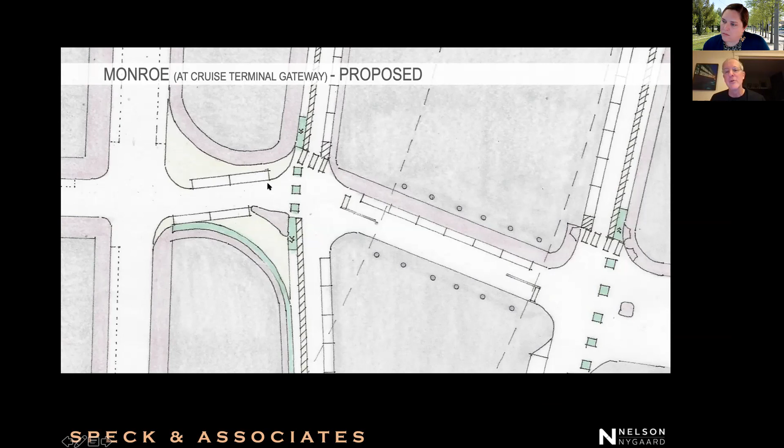This encourages comfort in walking through this area, as well as safety. One other point: this is your gateway, one of several, but a very important gateway to downtown. I love this—Dauphin Street's a 10-minute walk, that's very encouraging. If there was ever a place to invest in a more emphatic public art solution, like we find in some other cities on their underpasses, this would be a great place to do that.

This brief mention of the challenge is to say: where there is no curb cut, there could at least be a curb. Whenever you rebuild this street, that's an important thing to do. Secondarily, we introduced in Tulsa a program for consolidating curb cuts, getting rid of extra curb cuts, and having the transition between the lanes of parking happen in the parking lot and not in the street, which allows for a healthier sidewalk edge. That's another thing to keep in mind.

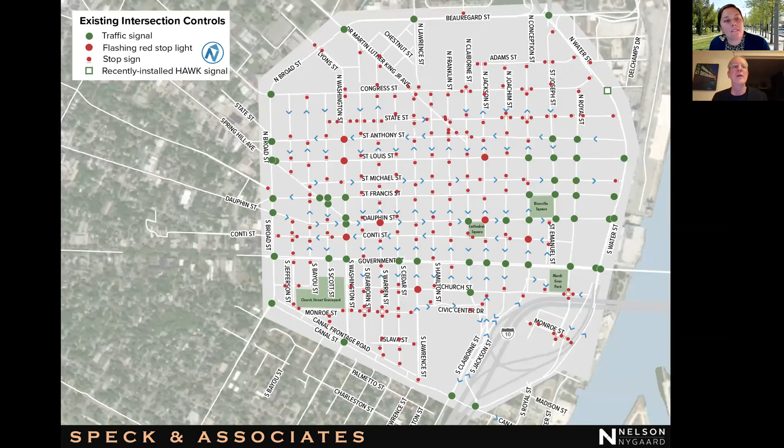Here are your existing controls, and here's our proposal. There's too much here to get into all of it, but all of these reds, these 21 reds, are signals that we believe should be all-way stops.

Now let me add, and I neglected to mention, a number of your signals downtown, the reason that they are warranted, that they should exist now, is because they're on multi-lane one-way streets. And a multi-lane one-way street is very hard to negotiate with an all-way stop, because then not only do you have people coming from different directions, but you've got people next to you in other lanes, so the confusion about who goes first is even greater.

When you revert the multi-lane one-ways to two-way travel, that eliminates the few signals that are warranted in the downtown. And so 21 signals can be converted to stop signs in conjunction with the reversion, particularly of St. Joseph and St. Anthony, to two-way travel.

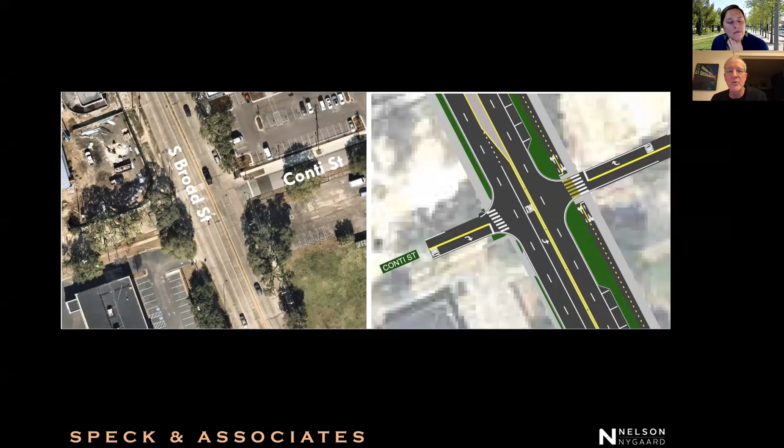You can't stop them from doing it. And if they're going to keep doing it, the question is, what's an outcome that would cause fewer of them to be threatened or potentially injured? So we proposed a solution that puts an island in the center here and shortens this turn lane. And it's written up in the appendix of our report, the arguments for it.

The turn lane is quite long, and it has to reach all the way down to Government, because the signal at Broad and Government is extremely heavily trafficked. And so there are a lot of cars that back up along this corridor. In fact, the changes currently underway at that intersection are changing what was a double left-hand turn lane to a single left-hand turn lane, which is going to cause considerable backup along this lane. Our calculations show that shortening that lane will only have a minimal impact on what's going to be a big backup there anyway, if you don't introduce that second lane of turning traffic.

And so we feel that for safety, even though it does undermine slightly the traffic performance of the street, we feel that some sort of solution here, maybe a different one, but some sort of solution that has crosswalks and welcomes the pedestrians doing what they're going to do anyway across Broad at Conti is really important.

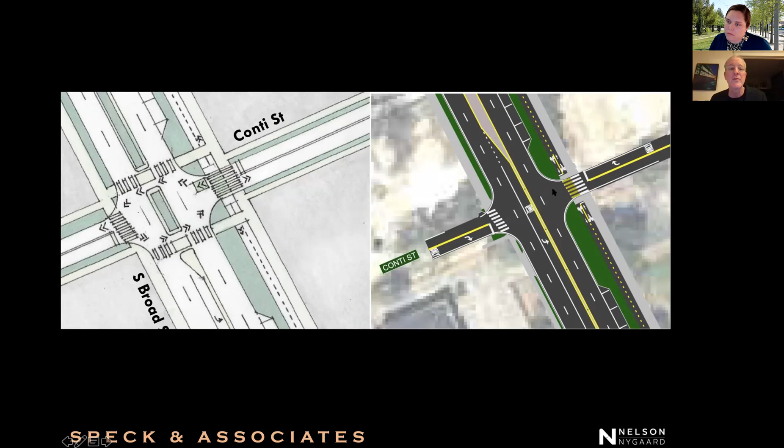That is unresolved. Also unresolved, and I think such an easy fix, and perhaps an emblematic example of inertia that causes things to not happen as quickly as people might like, which, by the way, is normal in every city, and it's a struggle that every city has, and there are reasons why things take a long time, but certainly there's no reason why Conti, which is like dozens of blocks long and terminates at your Renaissance Hotel, and lots of people are walking to and from the hotel east-west, does not have crosswalks, or at least doesn't have one crosswalk on one side of the street, avoiding the drive-through of the hotel.

This is really important. And so here's where I just kind of take the bully pulpit that I have tonight and say, come on, this is the kind of thing that should have been done already. And let's get that done quickly. It also should have some sort of flashing beacon or something that calls drivers' attention to pedestrians crossing there.

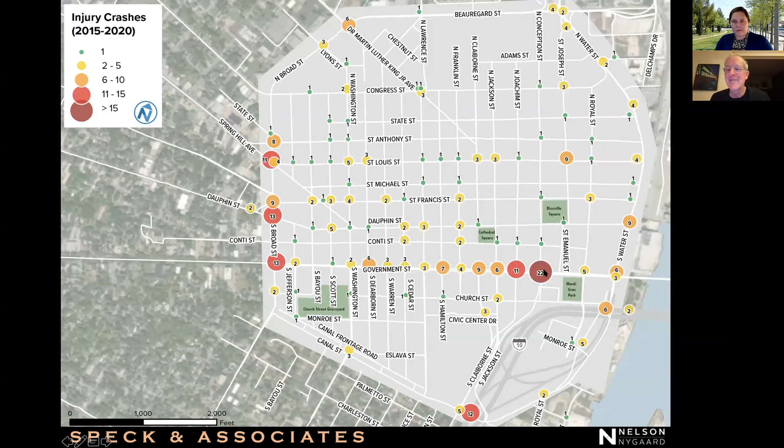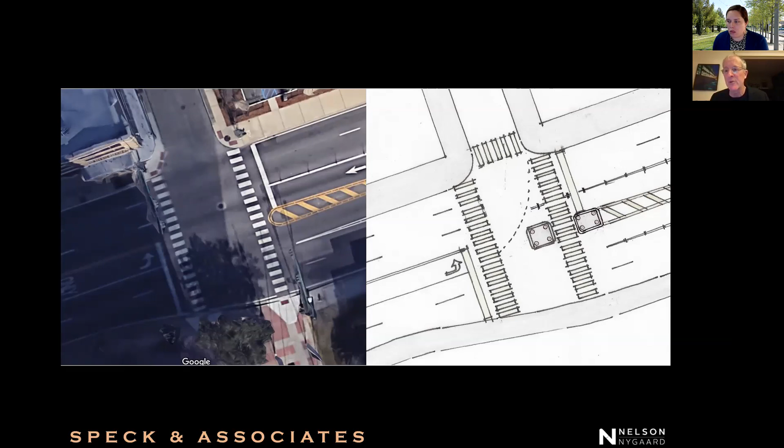That is everything. I'm afraid to look at the time. Not bad, it's only 8:40.

I have a little bit more to talk to you about. I swore I'd be done within 2 hours, and I will be. And I'm willing to go all night with the Q&A as long as people want to talk.

Canal Street is very strange. This is a part of the report that we added that we weren't asked to add. We always find opportunities, areas where there's a need for improvement outside of our study area. Canal Street is within our study area, however the whole neighborhood south of Canal Street is not, and so we did not meet with them. It's really inappropriate for us to make serious proposals for changing Canal Street without involving that neighborhood. In fact, we wouldn't do it. But I do think this is an area that needs recognition, that needs discussion, and hopefully before too long down the road gets its own planning study.

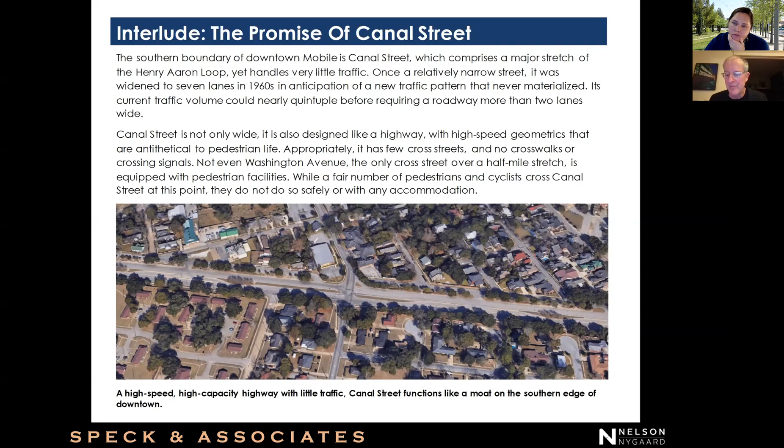I just want to call to your attention what many of you are probably aware of, but the really fascinating and challenging situation that exists there.

Now, I'm very sensitive, coming from New England, talking to you about this difficult history. I want you to know this happened everywhere. This happened in New York, this happened in Boston, you name it. It happened everywhere. It so happens that we're talking about Mobile, so that's the condition we're discussing tonight.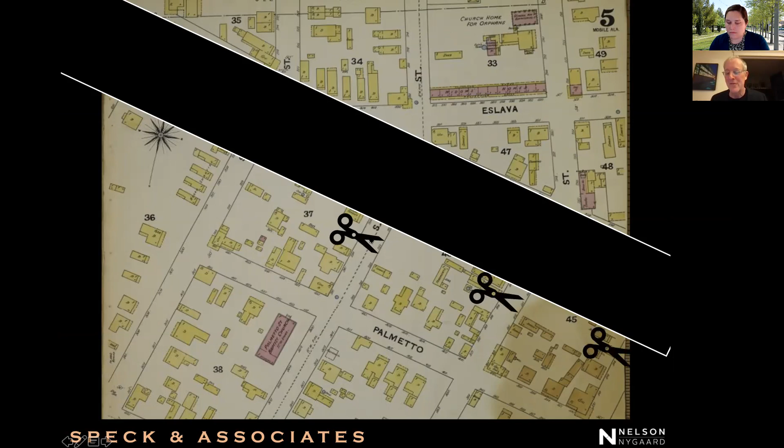But as happened in other places, not only did the poorer neighborhood get cut off by the road and condemned, but then those streets were shut. So they couldn't even access it—don't worry, if you live to the north you still have plenty of access to Canal, but from the south, those streets were closed. So it was a complete walling off, essentially, of the African-American neighborhood to the south of Canal.

When we met with this neighborhood group, we didn't meet with the southern group, so we don't know what they want. But the northern group was really open to the idea of somehow taking advantage of the fact that Canal was oversized, and wanting to act upon the less than fortunate history of this location to knit the neighborhoods back together. You can see the impacts, not just the impacts, but the reality of what Canal Street does with property values, and that some of the wealth to the north could easily benefit the properties to the south if there wasn't such a gully between them.

So we're hardly the first people to bring this up. In fact, the DPZ plan for downtown Mobile, which you're probably quite familiar with, had a very forward-looking proposal for that segment. What you see to the north is the existing trajectory of Canal Street with the frontage road on top and then the two-sided highway with its center turn lanes at the bottom. What the DPZ proposal did, pretty straightforward, was to rebuild exactly the destroyed area.

So it left the frontage road as the main street through the neighborhood, and then it put building lots on the area where the highway is currently running, and it reconnected the streets. I came up with an alternate proposal, and there were a number of motivations for this.

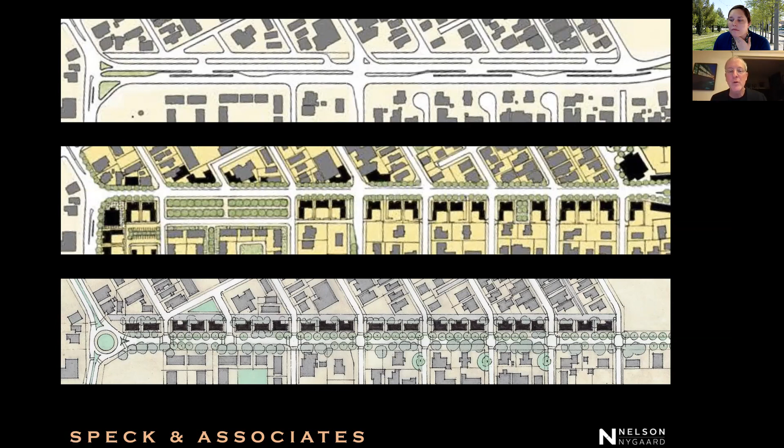I think that these should be moved forward, and subsequent to this study, it would be great to look at these alternatives and others. And I couldn't help myself as I was preparing this talk to think maybe the best solution would need to arise out of the neighborhood and conversations with both sides.

Some sort of merging that not only would bring the neighborhoods together, but create a space, maybe a space of reconciliation between the northern and the southern neighborhoods. You would shape it properly with buildings and give it trees and maybe have some sort of civic feature in the middle.

But I'm very excited about what this could mean. As someone who plans cities and not just streets, I'm very excited about what this could mean for the next urban move in downtown Mobile.

So that's just a little additional part of the plan that's discussed in the report, but I didn't want to ignore tonight as a potential for something really exciting that could help knit the city back together after the damage that was done by the highways inserted in it.

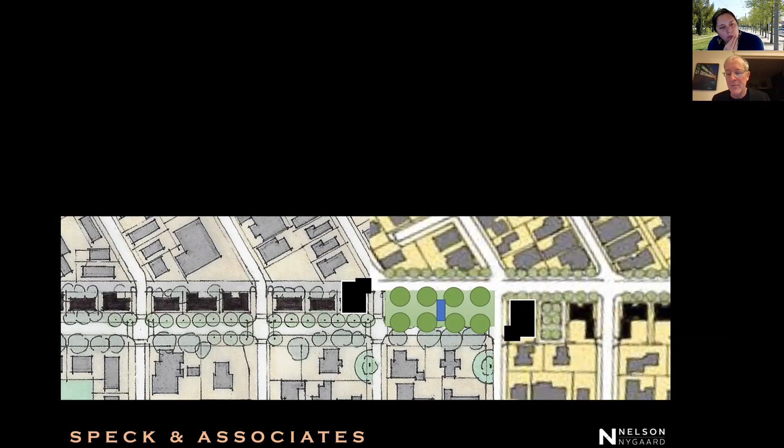So that is everything I wanted to share with you, except that the first part of the report does end with a list of priorities, because the question is, oh my gosh, there's so much in this plan. It's literally almost every street in downtown for which we've suggested some sort of change. Obviously, you have to start somewhere.

And so we thought about it. We discussed it with the Downtown Alliance throughout this process. What's most important? Allison and I have been considering it the whole time. And honestly, I think there are 5 things that need the most attention the fastest. They are Government Street, low-hanging fruit of the work that's already being done, the two-way reversion in conjunction with the signal elimination, having a phase 1 bike plan, and then the parking along Dauphin Street.

So just quickly, Government Street, we talked about the scheduled repaving, the scheduled signalization. Clearly that's an opportunity to fix it when those are done. But maybe the goal of safety and saving lives means we front burner those conversations even more so.

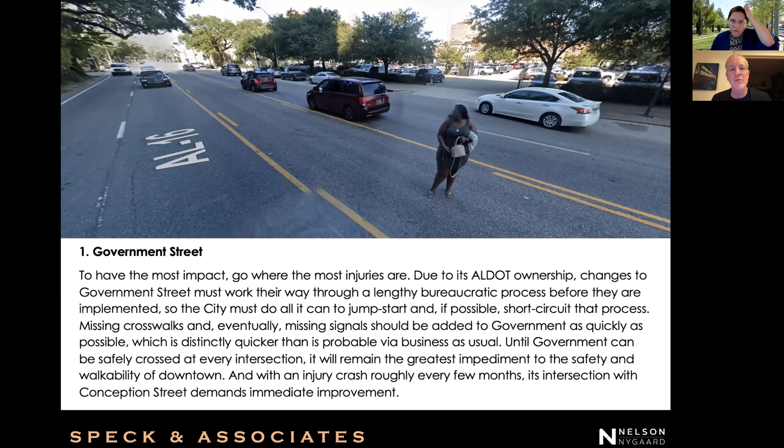Secondly, we talked about how the Beauregard Canal Interstate intersection was currently under discussion. We talked about how St. Louis Street is currently being rebuilt. We talked about the study that's being done for St. Joseph and how that can be not just made two-way, but restriped properly.

And then the immediate construction on Broad Street that enables the sort of interventions that would make crossing it safer, both for pedestrians and for bicyclists. So that stuff, it's happening now. Let's not let this opportunity escape us to influence where we're already spending money on changing our streets.

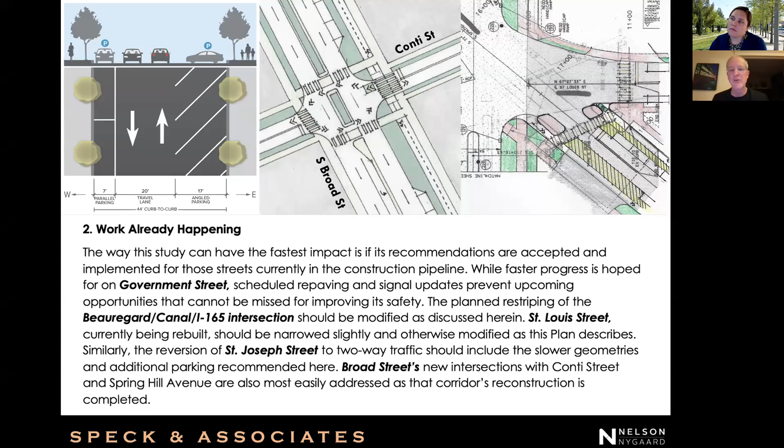Here's the big one. This is, I think in the book I described it as pulling off the Band-Aid. You can revert one-way streets to two-way slowly and painfully and expensively and confusedly, or you can do it all at once, much more cheaply, much more easily, with a much better opportunity for public outreach, for public awareness, and for greater safety, because everyone knows you're doing it all at once.

That's what they did in New Albany, Indiana. I say in the report, the study for St. Louis—sorry, the study for St. Joseph confirmed that you could do St. Joseph, which we should have known.

The study for St. Anthony—don't do the study for St. Anthony, okay? You can revert St. Anthony, you don't need a study. But moreover, all of those little one-way streets that should be two-way, you can do those all at once.

If you don't do the intersections all at once, you often have to change the signals twice, introduce new signal heads, and do other things that are extremely expensive. If you do the intersecting streets all at once, you only have to convert the signals to signs, and you don't have to do anything multiple times.

But importantly, it becomes this very visible public change that shows people are being progressive about improving downtown, and it's less confusing. It's such a big piece of news that it will be publicized and people will know about it. So your fear, a very common fear, that folks will be confused and avoid coming downtown, or drive around making mistakes because every week a different intersection is different.

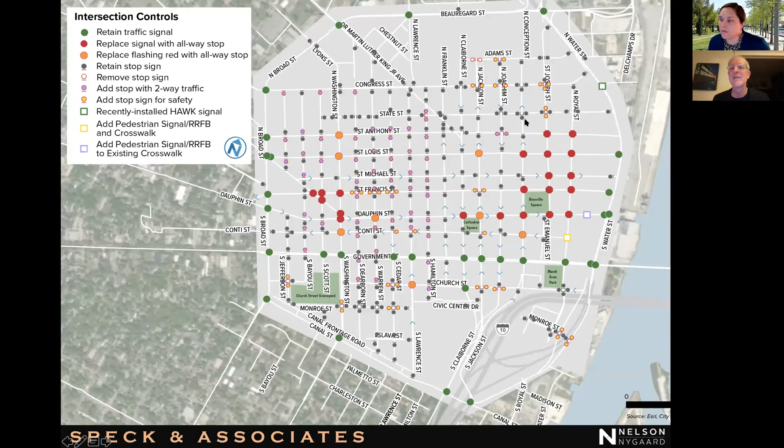So the directional changes, as shown, the signalization changes, specifically the reds, as shown, that's a really big chunk. The bike plan, you don't need to do all of it at once.

So we asked, what is the minimum that you could do? I mean, I guess there's a minimum that's less than this, but what's a really nice half of the bike plan? I think a lot of people are coming from the south. I think the Washington Spring Hill connector and the Lawrence Claiborne pair are really important from the south. I think if you want to wait on St. Francis because it's more complicated, just do the east-west pair of St. Michael and Conti in those one-way streets — that makes sense to do early.

Remember, there are bike lanes in Conception and Joachim, but also in Claiborne and Franklin. The thing about Claiborne and Franklin is, yes, you want to use up that extra street space, but the fact is all of these delicate little streets are pretty safe to bike on right now, and they'll be even more safe when they're two-way. So these are a little less necessary to get you through downtown.

So honestly, these streets — Washington, Spring Hill, Lawrence, Claiborne, Conti, St. Michael, and Conception, Joachim — that's a really good foundation. If you include the protection of the lanes in the Henry Aaron Loop and the missing link along Water Street, it's still a lot. I don't mean to suggest this isn't a big ask, but that's what a first phase bike plan would look like.

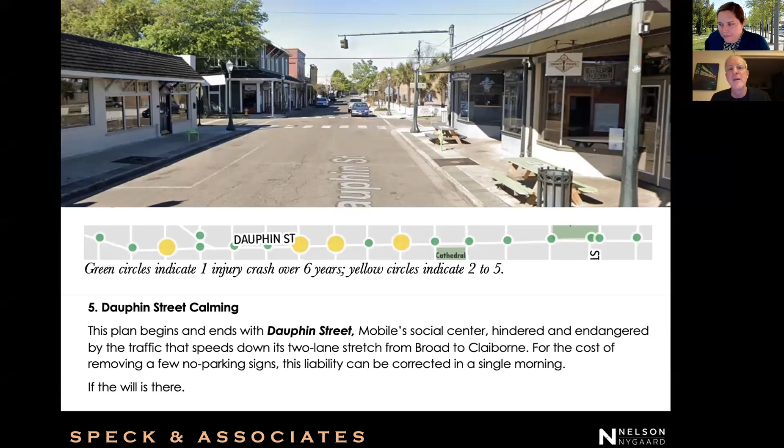And then finally, as the book says, the plan begins and ends with Dauphin Street. It's your social heart. For the cost of removing a few no-parking signs, this liability can be corrected in a single morning if the will is there. I really hope after this conversation the will is there, and that can be fixed perhaps tomorrow. So that's everything.

As I said in my initial talk to you two years ago, you've already got a really nice city. It can be a truly great downtown. It's really on the cusp of that, I believe. But your streets are in the way, as well as being on the way to making it all that it can be.

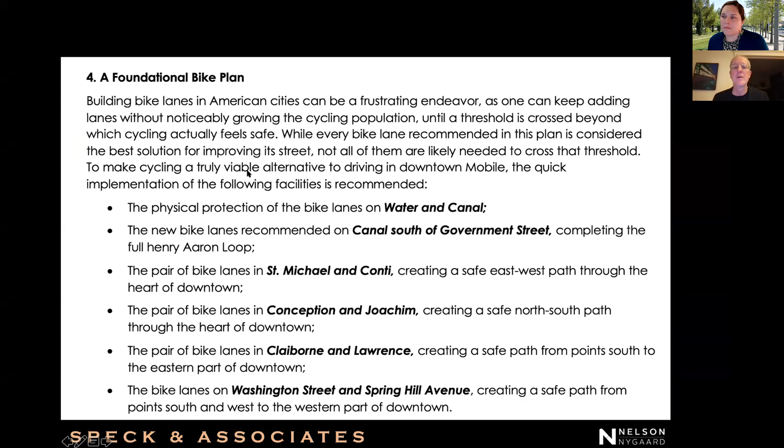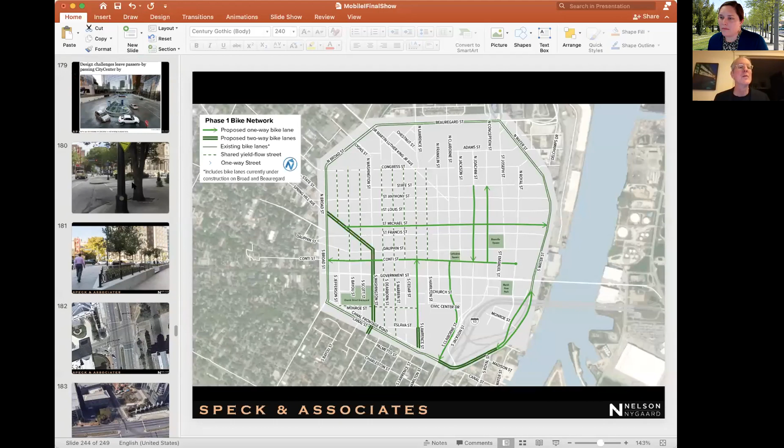So I think I'm in my PowerPoint now. Hang on, do you see my PowerPoint? It did for a second there, but it went away. How about that? Yeah, not in slideshow mode. Yeah, I'm not in slideshow mode because I need to zip along and find the bike plan. So the question was about the bike plan. We'll use the short term. Well, no, I guess I should go back, oh boy, sorry guys, I'm gonna go all the way back to the big bike plan. Here it is, okay.

First of all, there's a certain type of cyclist who will feel comfortable bicycling with traffic on Dauphin. I believe in the eastern half of Dauphin, and eventually the western half when it's parked on both sides, people will drive slowly enough that bikes can mix more safely with traffic. That will always remain a choice. But some folks don't feel safe in lanes that aren't designated. So eastbound travel will be welcome on St. Michael, paired with either St. Francis or Conti, an uneven pairing, which is okay as long as you have a way in both directions. We do feel the broad link allows for pretty easy north-south transition as people are coming in.

And of course, it takes a while to learn, right? So it'll take a while for cyclists to figure out what the best route is to get from here to there in the plan. And God knows this is a warty diagram. It's far from simple, and it's far from entirely logical. But what it is, it's logical in the context of where the space is available in conjunction with the demands that are being placed on it.

We're confident that if these lanes are all striped, or even if you temporarily don't stripe St. Francis, there's enough of a protected network for those who want it. And for those who wish to stay in the street, on a street like Dauphin, we actually welcome that. We just don't count on it.

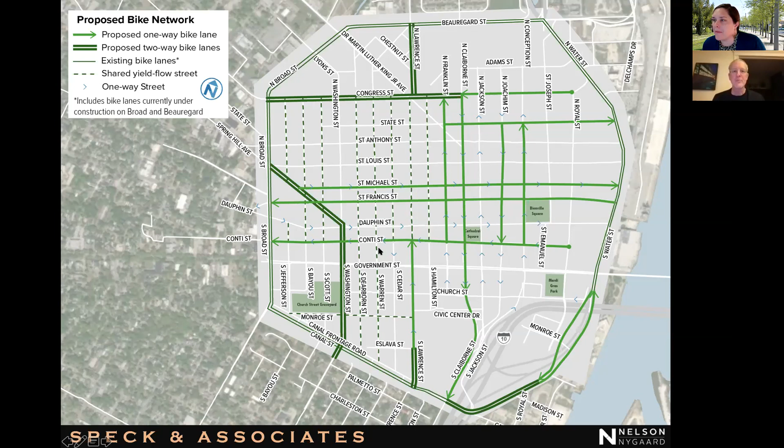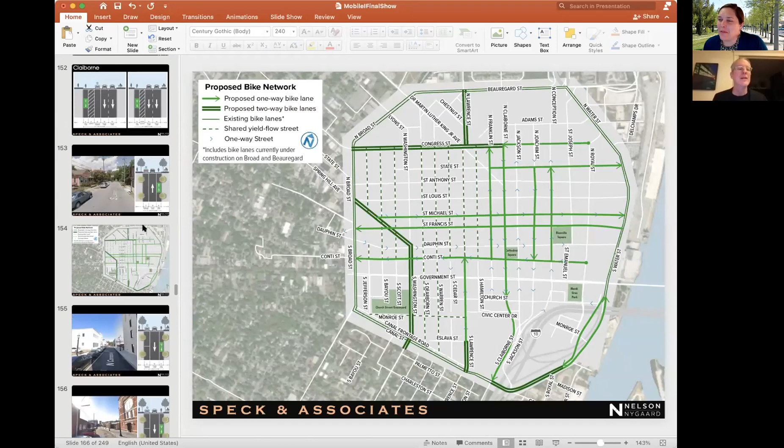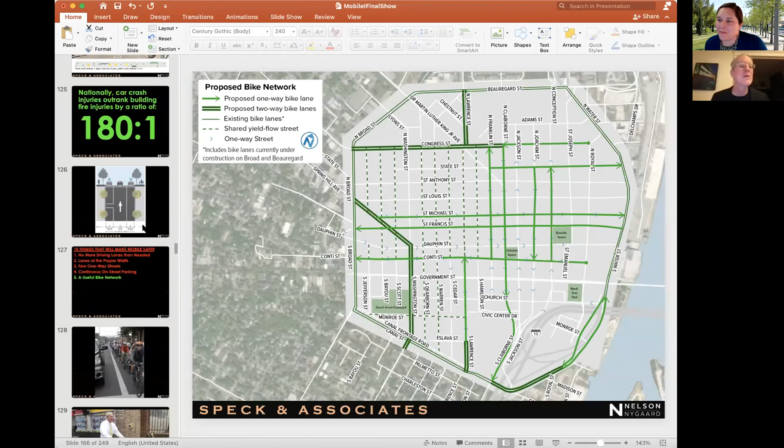Given you have the slides still up, we may want to go to the conversions map. Jeff, can you scan to that? Because there's a question about, there's still a number of one-way streets in our network, and why. We approved some conversions and some not. Allison, hopefully between us, we can answer that.

Okay, and they added also that it's hard to give people directions on how to get around downtown. Yeah, I mean, every street that we convert from one-way to two-way reduces the degree of confusion that you'll have in the downtown. Every street that you see not converted to two-way in the slower speed part of the neighborhoods is because there was some impediment that, at least in the short term, we felt we couldn't get around.

In the case of Lawrence and Cedar, I believe it was the signalization on Government. Was there a specific segment that was being, and then, for example, in the case of Lawrence, it was because of the request for bike lane instead of two-way. These streets were all to the east of Hamilton, were all maintained as one-way because they're too busy to be yield streets. They're too busy to have that single 12 to 13 foot travel lane in two directions. From Hamilton West, they're really not too busy for that.

And of course, Washington's already two-way. Anything you see that's gray here is already two-way. So all of the exceptions east of Hamilton are due to the fact that they're not neighborhood, slow, gentle streets. All the exceptions west of Hamilton, in which a bike lane was requested, were because, and I guess it's just Cedar, was because of...